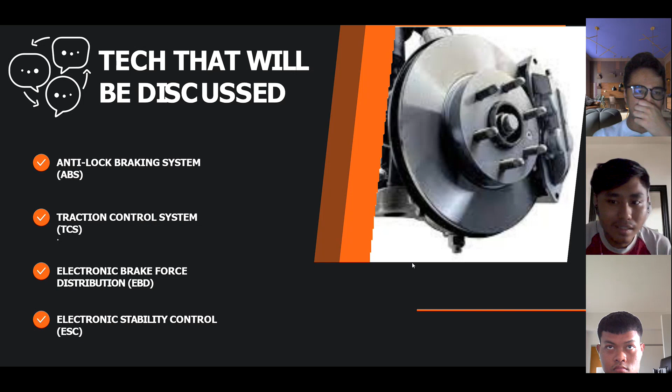Let's start with the anti-lock braking system. So what is ABS? As Haikal said, it was introduced in 1969, and now is a compulsory braking system found in most modern cars ever since 2012.

So that's basically what anti-lock braking system is. Can we go on to the next?

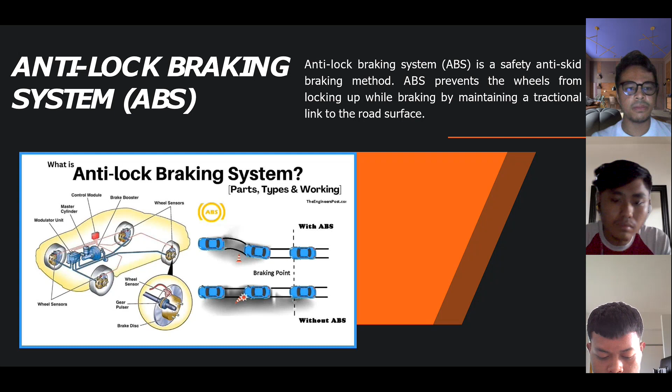Next is traction control. Traction control is an active safety feature that helps keep the car's tires gripping the road in slippery or dangerous conditions. While ABS functions to stop the car in slippery or dangerous situations, traction control helps the car maneuver and steer in treacherous and slippery conditions.

If traction control is not applied in cars, there's a high chance that when cornering in slippery or dangerous situations, or even otherwise, the driver may experience skidding like oversteering or understeering, and we don't want that to happen. So traction control helps keep the tires gripping the road and limits wheel spinning, making it safer for you to drive.

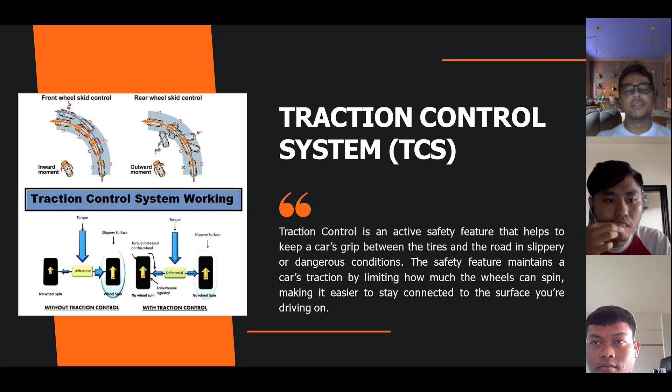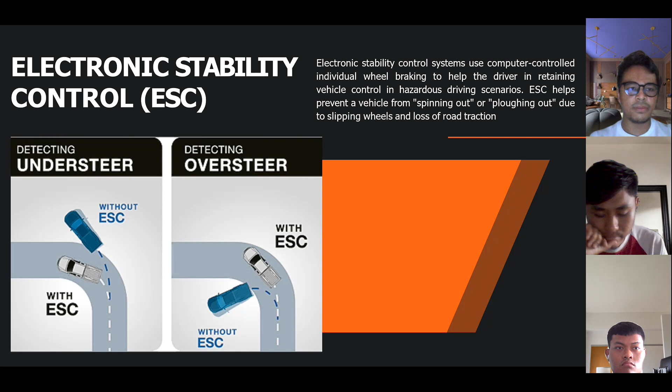Okay, so next is electronic brake force distributor, EBD, and I find this the most interesting braking system out of all the four, because basically it's like ABS, but it's a bit different in a way that, as the name itself says, electronic brake force distributor, it helps the car brake by distributing different forces on the wheel.

Because when you're on the road driving, the tires are spinning at different speeds. So when you stop, if you just use normal braking without EBD, it has different speeds when it stops. So when you have electronic brake force distributor, it helps the car distribute braking to all four wheels accordingly, to stop safely at parts where conditions are dangerous and slippery.

And also it helps the car not lose control while driving and braking at the same time.

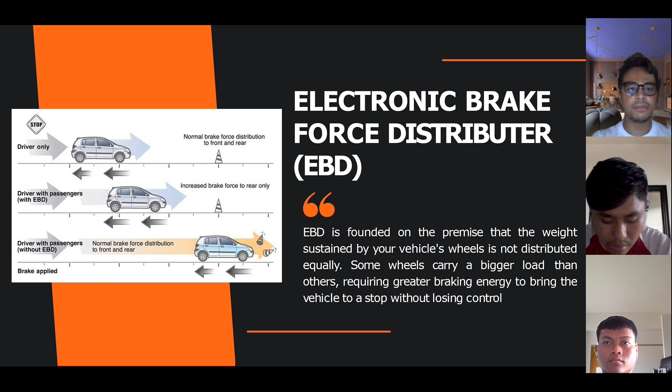Okay, now we look at the advantages and disadvantages of ABS, anti-lock brake system, traction control, electronic stability control, and electronic brake force distributor. All right, let's go to ABS first.

So ABS really helps drivers - the main advantage, like I said previously, is that it helps the car stop or brake in slippery situations and prevents any lockup or skidding from happening. Because ABS, in slippery conditions, will assist the driver to stop on ice or any slippery conditions.

So that the driver has perfect control of the vehicle and can drive safely, even though they have to brake in those situations. And not only that, the ABS system is also integrated with traction control, so that means it's a two-in-one package. It helps manufacturers distribute safer vehicles.

However, the disadvantage about ABS is that it's a very delicate system. It's not computer-generated, so it cannot generate the scenario well at times. Sometimes the brake sensors may go on even if it's not in that situation, or it may misjudge the situation. So that is a precaution when it comes to ABS.

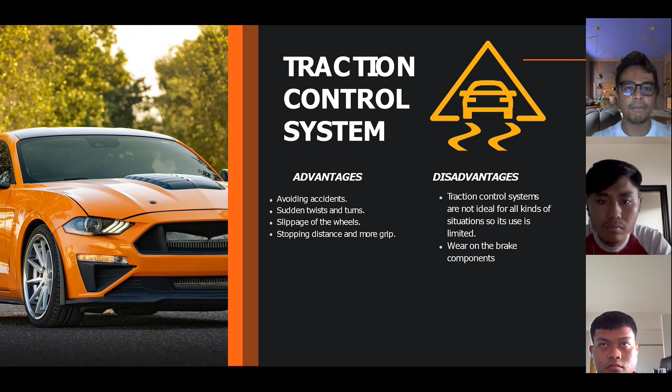Okay, so the electronic brake force distributor. So again, it helps reduce braking distance compared to ABS. ABS is that the driver has to intervene and brake. However, when it comes to the electronic brake force distributor, when the driver brakes, it helps to distribute force at each side of the wheel so it can brake even faster and reduce the braking distance, right?

So it helps cars behave stably when doing corners. And not only that, the nature of deceleration is less dependent on the load of the car, meaning that it's very good for commercial cars, production cars, like families who are driving with big loads; they're able to reduce the braking distance. That's very good. And then the set of conditions under which a skid may occur during braking is minimized.

Same thing like ABS. However, when it comes to the disadvantages, I think it's also similar. We can see a common trend here is that it doesn't have a very good algorithm, meaning at a certain braking point, it doesn't brake at the right moment. It depends, right? So not only that, it can create problems with the chassis. The system is not perfect on slippery slopes, so it still automatically shuts off in such conditions at low speed.

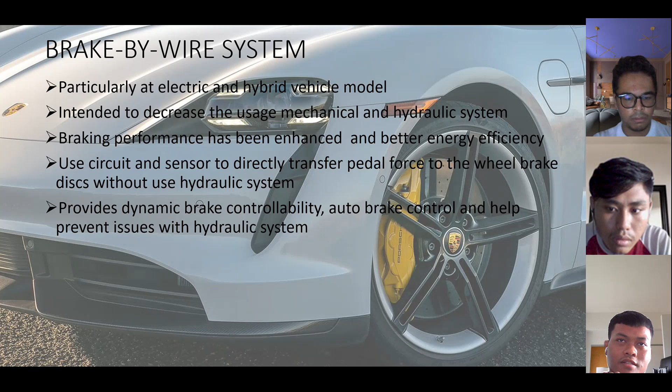The advantages of the brake by wire system. Firstly, this new and future brake system helps to slow the car in a process called regenerative braking. The motor in this brake system serves as a temporary generator by capturing the motion-based energy of the vehicle and storing it as electricity in the battery. For forceful stops, the conventional brake pads and brake discs are still required in this brake by wire system, but it makes it simpler for engineers to smoothly combine the brake force of the two.

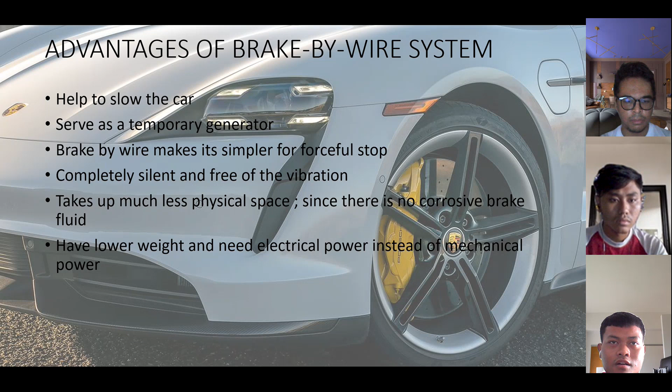The brake by wire system is completely silent and free of the vibration usually felt through the brake pedal and associated with anti-lock brakes because there are no mechanical parts. It also takes less physical space, which is an important factor given how tight engine compartments have become. And since there's no corrosive brake fluid involved, the brake-by-wire system is considered less damaging to the environment. Finally, brake-by-wire systems have lower vehicle weight and need electrical power instead of mechanical. So this braking system is now in hybrid and electric cars.

So for the conclusion of brake systems, the evolution of complex subsystems in the automotive industry is a sequence that may be seen in the story of brake systems in cars. For many years, the hydraulic brake system has been used in the automotive industry, and in the long-term view, the brake-by-wire system will be fully integrated into vehicle dynamic control algorithms. The brake-by-wire system has increased active control during the braking process compared to conventional braking systems.

The brake-by-wire system is more efficient, energy saving, has a responsive structure, and aims at braking through dynamic response compared to traditional hydraulic brake systems. That's all from us.